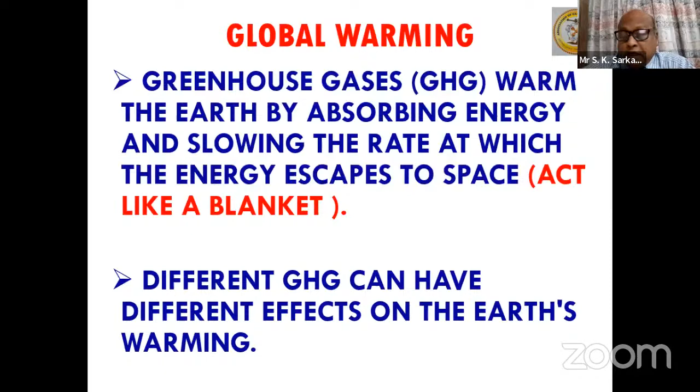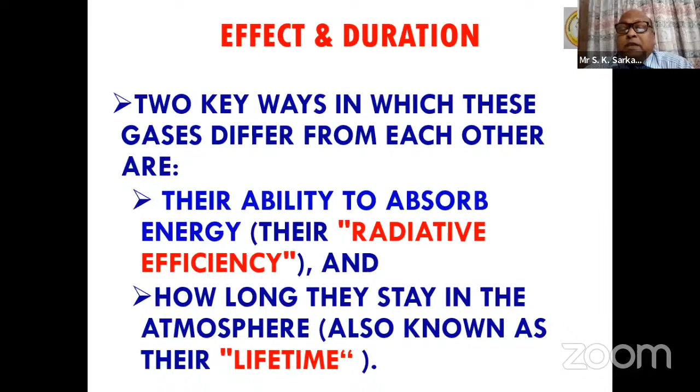There are 2 effects. One is the radiative efficiency of the greenhouse gas, and the lifetime, how long the gas stays in the atmosphere. These are the 2 properties that determine how much warming this greenhouse gas will cause to the earth.

This greenhouse gas emission, yes, of course, when there were fires in the forest, CO2 was emitted. Emission of CO2 is nothing new. But this warming was initiated by the industrial revolution in the 19th century and the subsequent growth of world population. Demand and production of energy from fossil fuels have increased rapidly in recent years. Till now we were safe, we were not careful, but now it has become very rapid. It has begun to skyrocket after the 1950s.

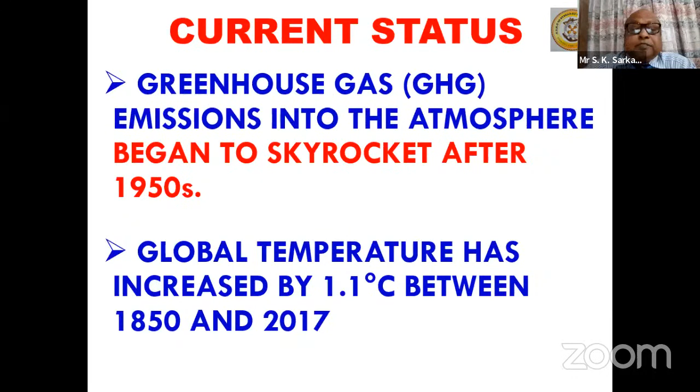Global temperature has increased by 1.1 degrees centigrade between 1850 to 2017. These are the findings of research. Here we can see how CO2 emission has skyrocketed. If we say 1800 is 0, today it has gone to 7,000 million tons of CO2 being released. You see the steep rise, and it is very alarming.

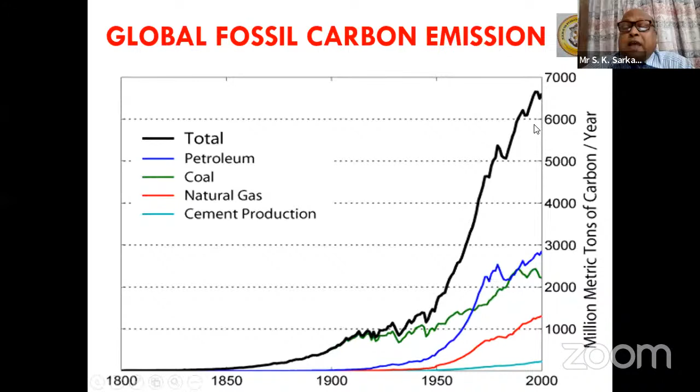Now, if we don't stop this increment of CO2 — there are various greenhouse gases as mentioned earlier in the introduction, but CO2 makes up 80% of what we are emitting. The important greenhouse gas CO2 comes on top, but its global warming potential is only 1, which is very low. What is alarming is the volume and quantity of CO2 coming into the atmosphere. There are other gases like methane at 21, nitrous oxide at 310, hydrofluorocarbons which are used for refrigeration.

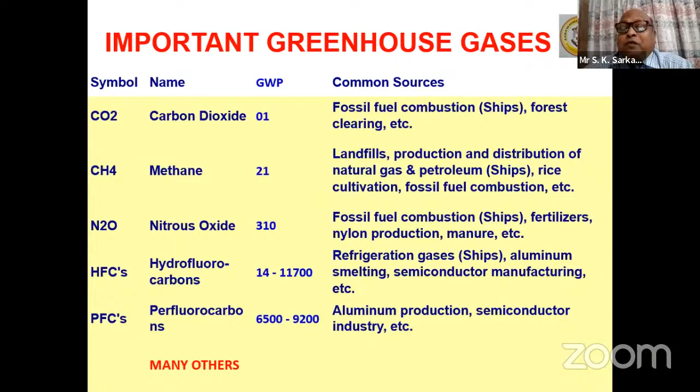Now, what are the environmental effects of this greenhouse gas? And when I say greenhouse gas, please consider it as CO2 only. Melting of polar ice caps and rising sea levels, changes to ecosystems, acidity of our oceans, species extinction, extreme meteorological phenomena — all of us in our daily life are facing these things. It is nothing new, but the only thing is we don't care for it, other than just discussions in seminars.

As per a study of the Intergovernmental Panel on Climate Change, IPCC, global warming of more than 1.5 degrees centigrade would cause unprecedented climatic consequences, such as bigger and more intense storms, rain followed by more prolonged and intense droughts, etc. These extreme weather events could be more frequent and intense and have irreversible repercussions on the environment.

In India, we have recently, in the last year, frequent storms coming, untimely rains, that is causing harm to our environment, our agriculture, our day-to-day life. So these are the bad effects which we are facing every day.

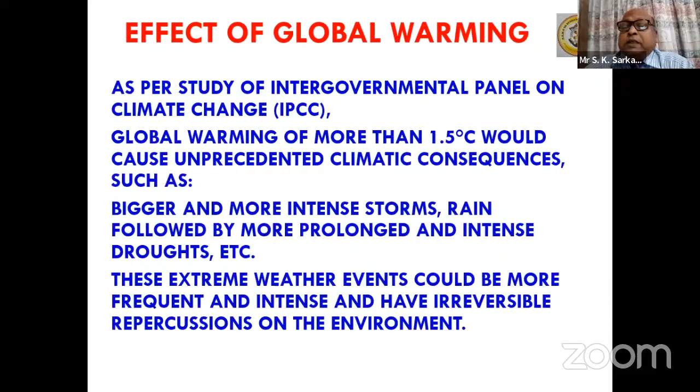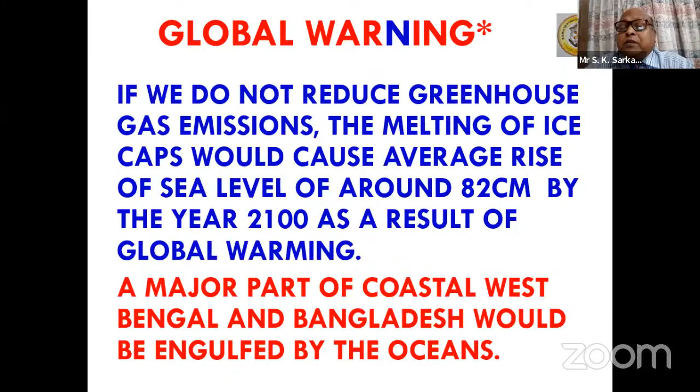Now this has caused a global war—instead of global warming, we say global warning. If we do not reduce greenhouse gas emission, the melting of ice caps would cause an average rise of sea level of around 82 centimeters by the year 2100 as a result of global warming. And most interesting is that a major part of coastal West Bengal, Bangladesh, like Sundarban areas, and many other coastal areas of the world will be submerged due to this global warming. And that will have a very adverse effect on the life of human beings.

So what do we expect from the industry for this? Business carbon offsetting can be done in the following ways: conduct awareness campaigns, improve energy efficiency—do not use inefficient machinery, consume renewable energy, transition to renewable energy, and search for carbon-free fuel. This is very important, the latest thought for carbon-free fuel. I will be mainly covering this area, improving energy efficiency, and my co-speaker, Mr. Arun Kumar Singh, will be talking on search for carbon-free fuel and renewable energy.

Our Vice President asked, can we use solar panels on ships? Certainly we can. There was an experimental ship, of course very low capacity, which went all over the world on solar power. It was built in Japan. There is a Japanese effort to see how effectively we can use solar power, and we are using it. There are cases where we are using solar power. Not only solar, other renewable energy also we are using.

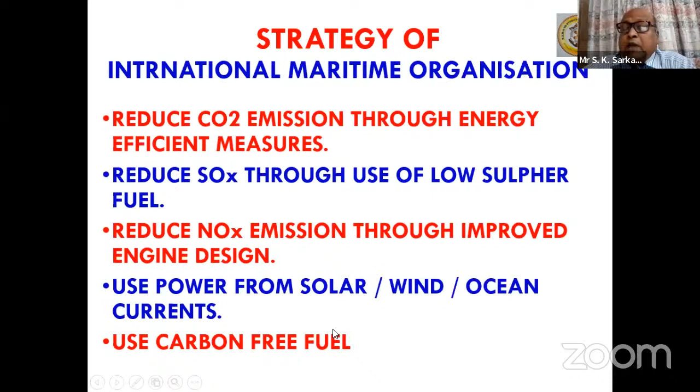Steps so far taken by IMO: in 2013, the International Maritime Organization introduced the Energy Efficiency Design Index for ships, EEDI. So what is EEDI? EEDI is a measure for carbon efficiency—how much carbon you are releasing to the atmosphere per unit transport work, that is ton-miles of cargo carried. How much CO2, that is the measure. And every ship, at the design stage only, the shipbuilder has to assure IMO or the administration that they will not release more than this amount of CO2.

New ships built after 1st January 2015 are required to limit CO2 emission to a maximum value depending on the type of ship, size, and year of build. In fact, it came into force in 2013, with a relief period of 2 years. From 2015 onwards, every 5 years, they are tightening the level of CO2 release into the atmosphere. This is given by EEDI.

I'm not going into details, but there are calculations for how you find out EEDI required, EEDI attained—actually what we have done—and EEOI, Energy Efficiency Operational Indicator, that is your actual performance, what you are actually doing.

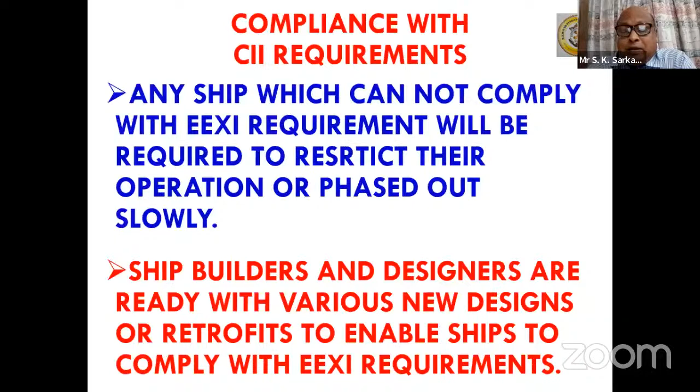Now, not all companies, but there are certain companies who use the latest developments which are going on. But it is not being done always. So IMO wants that everybody must follow the developments. And that is what this EEXI and CII is going to ensure.

So how do you get energy efficiency? By improving hull efficiency, you can improve EEDI or EEXI, CII. These things can be achieved in various ways. First is improving hull efficiency, improving propeller efficiency, and improving the overall thermal efficiency of the propulsion plant. These are already developed, but not all owners are following this, so carbon emission is high even with the EEDI.

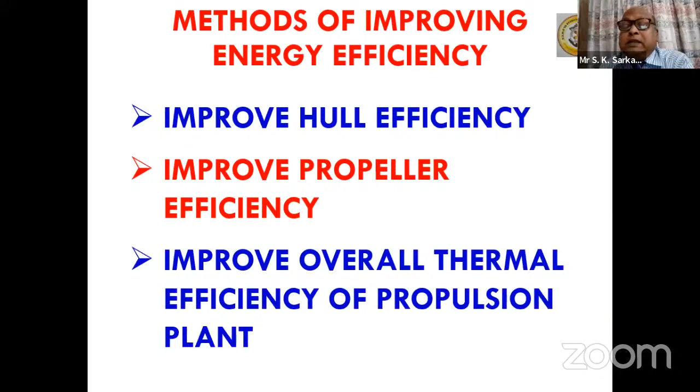So what are the ways shipping companies and ship owners will be able to comply with the latest requirements of CII and EEXI? Now let us see how we improve the efficiency.

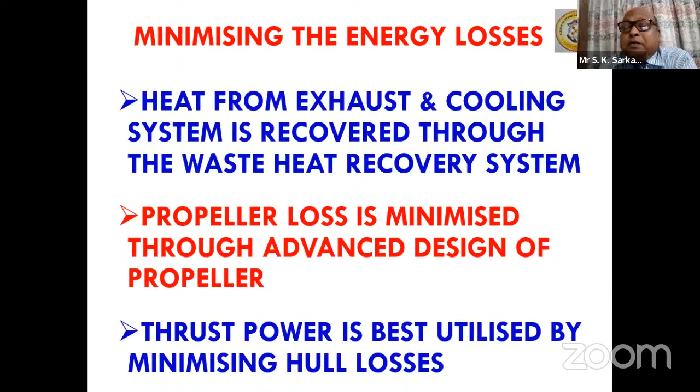So what is done? That is what I explained now. Heat from exhaust and cooling system is recovered through waste heat recovery system. Propeller loss is minimized through advanced design of propeller. Thrust power is best utilized by minimizing the hull losses. Actually, why do you require the thrust? For moving the ship from A to B, if there's no friction, no power will be required. Because of friction, we are requiring the power to move the cargo. Now that friction has to be reduced.

Now, waste heat recovery, just for your knowledge, this is an advanced MAN B&W engine waste heat recovery system. The engine efficiency is above 49%, and overall efficiency goes much higher. What is being done here? Jacket cooling water, some of the heat of the jacket cooling water - this engine is about 68 megawatt, and 14% of the 68 megawatt, about 8-9 megawatt, that much energy goes to waste if you don't recover it. So it is being recovered here.

And another area, the turbocharger, supercharging air, scavenge air. In the turbocharger, air is compressed and temperature comes to 193 degrees centigrade. So that heat we can take out and bring it to the exhaust steam system, and by which we can run the steam turbine to generate electricity. This is one waste heat recovery system. So we are reducing the losses.

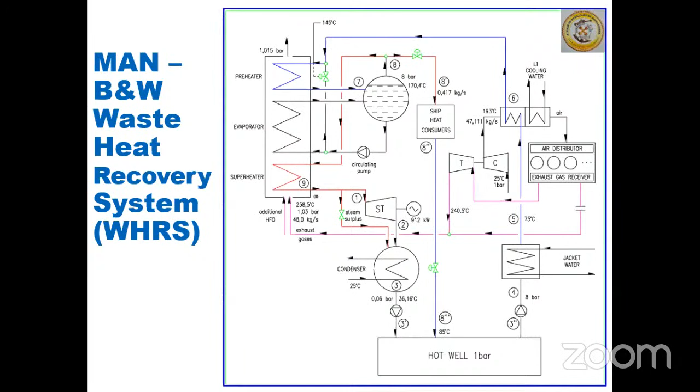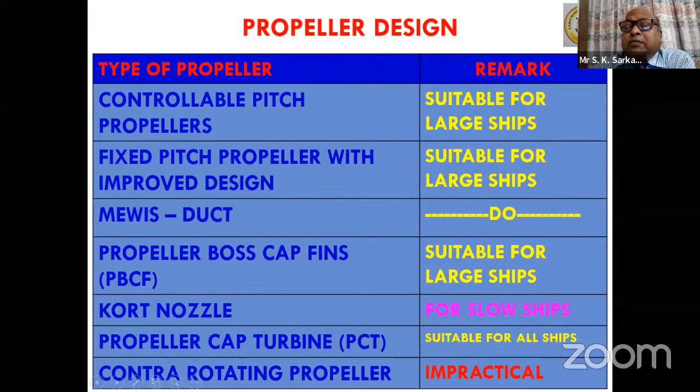Now there are controllable pitch propeller designs, suitable for large ships. Fixed pitch propellers suitable for large ships. Mewis duct, okay, for large ships. Propeller boss cap fins suitable for large ships. Kort nozzle, actually this is not for normal ships, these are for tugs and slow ships. Propeller cap turbine, this is also suitable for all ships. And contra-rotating propeller, this is impractical because it's a very complex mechanical system.

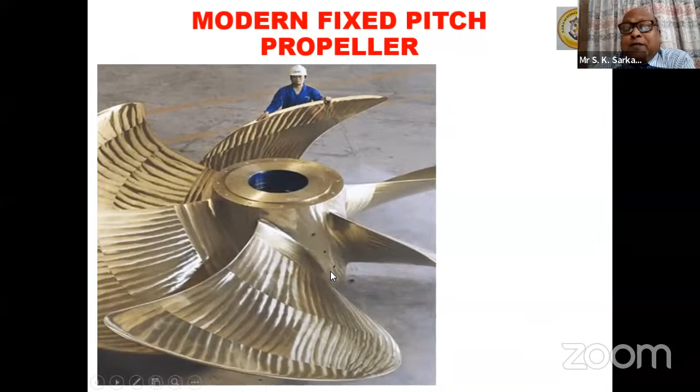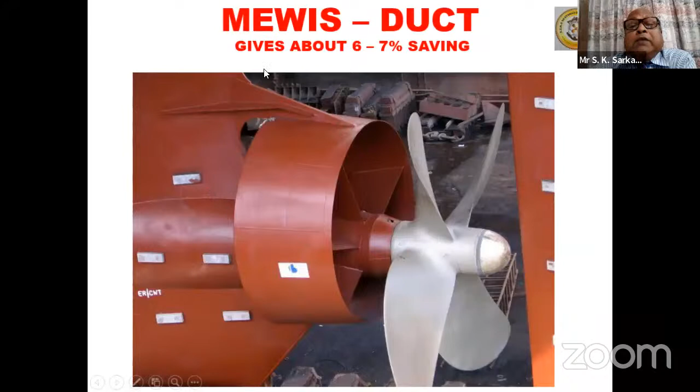This is Mewis duct. This gives streamlining of the water into the propeller, giving about 6 to 7% saving. This is propeller boss cap fins. There are some fins you add on the propeller boss cap. It can very easily be used and gives about 3 to 5% saving. This is one type of advanced design of propeller by Wärtsilä.

Improvement by the cleaning of the hull. Conventionally, you clean the hull. Earlier, we used to clean the hull every 2.5 years, drying it up. But nowadays, every shipping company keeps track of how much is the hull resistance, and from there they are cleaning the hull more regularly, underwater cleaning.

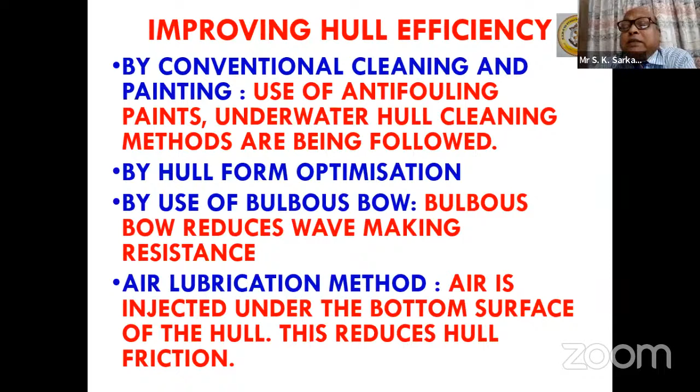Use of bulbous bow. This is another attachment to the ship which reduces the wave making resistance. And air lubrication, this is another very important and latest design. So this is the fouled hull. From the load diagram, we can find out where the engine is operating, so we can find out whether the hull is fouled or not. And without going to dry dock, underwater hull cleaning can be done. So fuel consumption goes down, and hull painting reduces the hull friction.

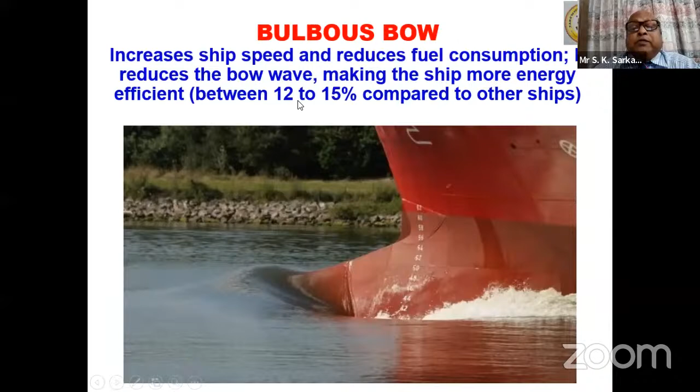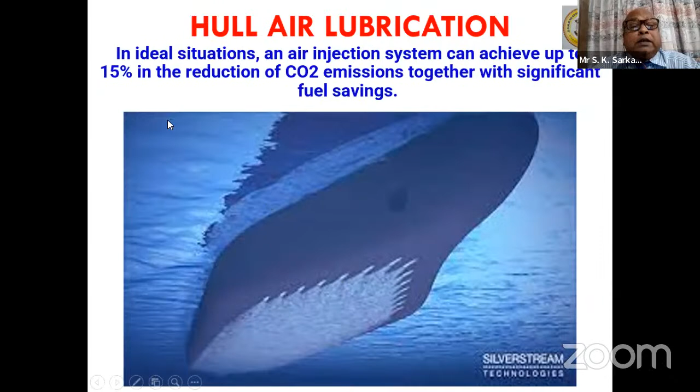This is the bulbous bow, which is underwater and it reduces wave making resistance. This gives between 12 to 15% saving compared to normal. And this is the air lubrication of the hull. Under the hull, air is being injected, and a film of air forms around the ship's hull, and it reduces friction. 15% reduction of CO2 emission is achieved by this.

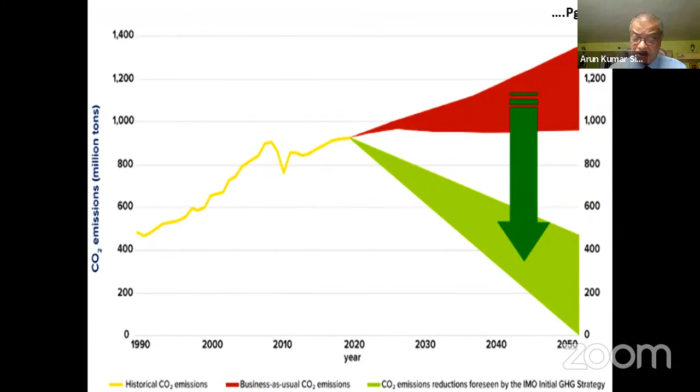If we have zero carbon, that is what the goal is. If we can continue our research and find a fuel that produces zero carbon, by 2050 the emission may come down to zero, but that is just one of the possibilities in the offing. Until 2030, the focus is predominantly on biodiesel, and until 2050 on transition of LNG and bio-LNG.

In 2020, there was a shift from using heavy fuel oil to using light fuel oil to power ships. In January 2020, the International Maritime Organization, IMO, put a cap on sulfur content of marine fuels. You have to use less than 0.5% sulfur content. That brought down the consumption of heavy fuel oil from nearly 172.5 million metric tons to about 100.5 million metric tons.

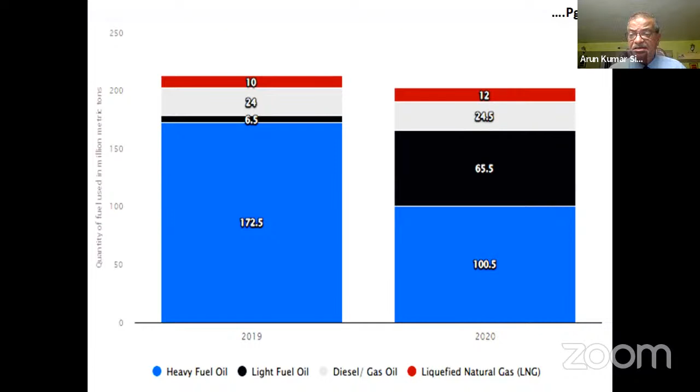And it was supplemented by low sulfur diesel oil. The rest of your liquefied natural gases and other fuels remained pretty much constant. They did not increase in this particular period.

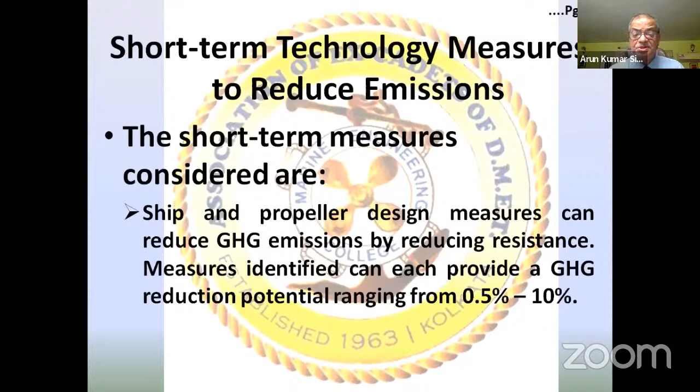Now, what short-term technology measures can we have to reduce emissions? The short-term measures considered are ship and propeller design measures, which can reduce GHG emissions, as Mr. Sarkar said, by reducing resistance. Measures identified can each provide a GHG reduction potential ranging from 0.5% to 10%, depending on what alternate power assistance technology we use, whether it is Flettner rotors driven by air, towing kites, sails, solar panels, or shoreside power.

Now, shoreside power can only be used in port when the ship is alongside. Again, the energy source for that particular power should be taken into consideration. In case we are using fossil fuel, there is not going to be any reduction. These measures can reduce GHG emissions from 0.5 to 15%, and up to 100% as far as shoreside power in ports is concerned, in case we are not using fossil fuel for generating power.

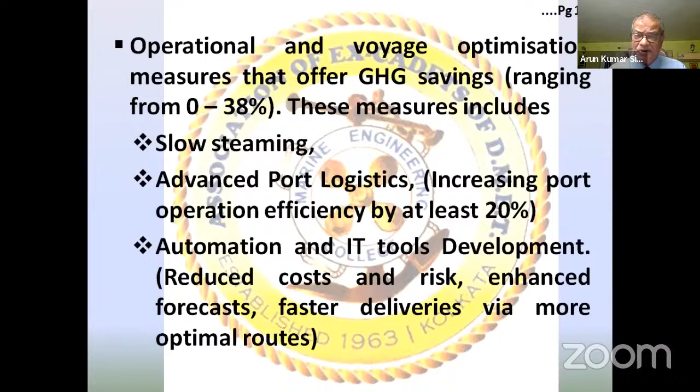Operational and voyage optimization measures offer GHG savings ranging from 0 to 38%. These measures include slow steaming, advanced port logistics, increasing port operation efficiency by at least 20%, automation and IT tools development, reduced costs and risk, enhanced forecasting, and faster deliveries via more optimal routes. All these things are there in the offing, and they have been used for a very long time, but these are not the things we are looking forward to for reducing greenhouse gas emissions.

Longer term shifts to alternative fuels.

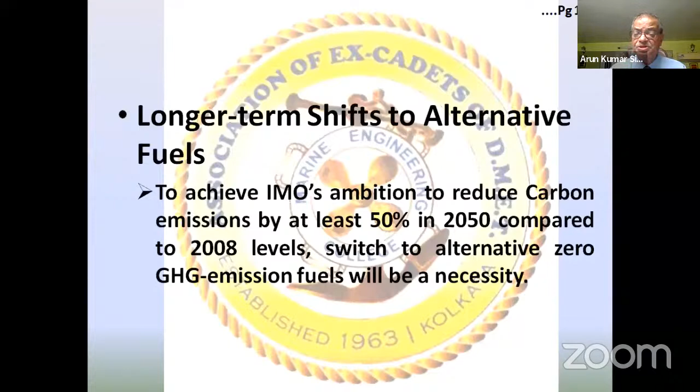To achieve IMO's ambition to reduce carbon emission by at least 50% in 2050 compared to 2008 levels, switching to alternative zero GHG emission fuels will be a necessity. If we cannot do that, it is going to be very difficult to reach the goal that IMO has set. The trend shows transition will first apply to short sea shipping and later to long distance shipping.

Fuels investigated have been categorized into two main groups: drop-in fuels, which can be used in the existing fleet largely without engine modifications up to certain blend limits, and others.

Now, when we talk about shipping, we must understand that there are set rules and regulations as far as the combustion of fuel is concerned, and the engines. Changing the whole engine setup for the old ships is going to be a bit difficult, but there can be some fuel which can be used without changing or doing any retrofit as far as the engines are concerned.

Then we have to go for alternative fuels which require significant engine fuel system modifications, alternative engines and/or infrastructure. Unless we do that, we will not be able to achieve it.

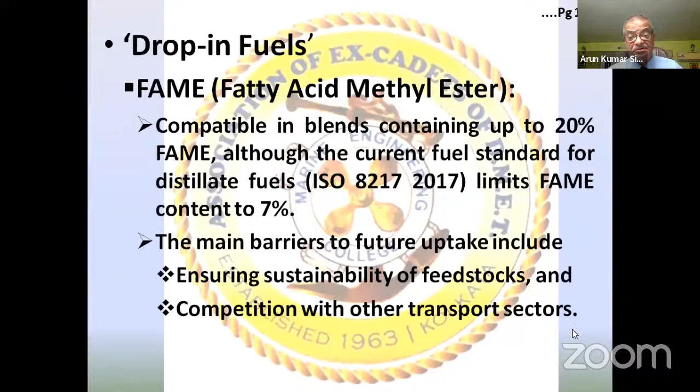The most important drop-in fuel that we have in the present day is fatty acid methyl ester, FAME, compatible in blends containing up to 20% as of the current standard for distillate fuel ISO 8217 2017, which limits FAME content to 7%. The main barriers to future uptake include ensuring sustainability, whether we will be able to produce so much of fatty acid methyl ester or not, because of the feedstocks required to make this particular fuel, and competition with other transport sectors. If they are cheaper, then making this particular fuel is not going to be of much use to us.

Then we can go for hydrotreated vegetable oil, HVO. It is compatible with the existing infrastructure and engine systems, subject to approval by the manufacturers. Most of the time, we have to check with manufacturers whether the engines can use the alternate fuel or not. Minor modifications may be required. There is no upper limit as far as blending HVO is concerned. We can use HVO at the present stage without any modification as far as the engine is concerned.

The main barrier to future uptake includes ensuring sustainability of feedstock and competition with other transport sectors, the same as FAME.

Then we can use dimethyl ether, DME. DME has been a known substitute for diesel for more than 20 years, but is yet to be widely used as an alternative maritime fuel. DME can be used with marine diesel oil in blends equal to or less than 40%. It's not a permanent solution, but during the transit phase, we can use this particular fuel to keep on reducing the carbon emission from ships. DME use will need engine retrofit or specific engine design. The barrier to future uptake is the need for green DME production and supply, that is, no more use of fossil fuel along with it.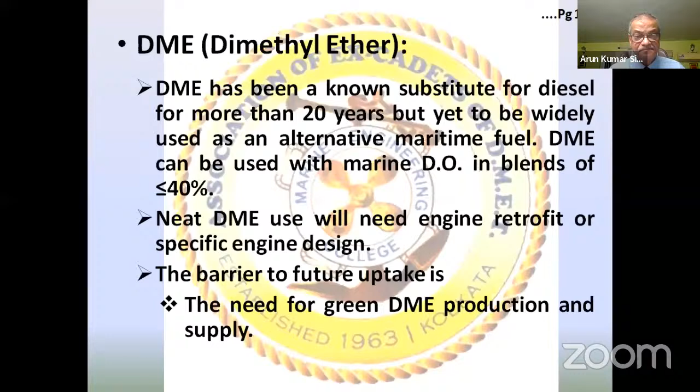Other alternative fuels: LNG, liquefied natural gas, a fossil fuel with a lower carbon content than HFO. LNG as a marine bunker fuel has already reached market maturity. It emits 25% less CO2 than common marine fuels and lower nitrogen oxide, sulfur oxide, and particulate emissions. It can only be used as a transitional fuel till zero carbon emission fuels are used for substitution. This is not going to be a permanent solution.

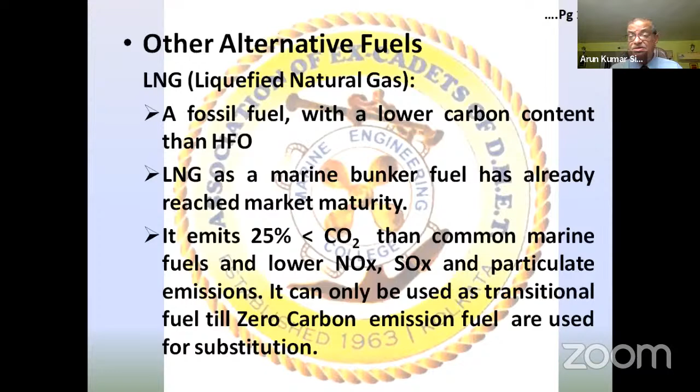The main barriers to future uptake include life cycle emissions. That means during its lifetime, if the carbon dioxide is not utilized by nature, it is going to keep on accumulating in the ecosystem. Bunkering infrastructure is also one of the things. And while we are burning LNG, the methane slip that keeps on producing carbon content in the atmosphere is another big deterrent.

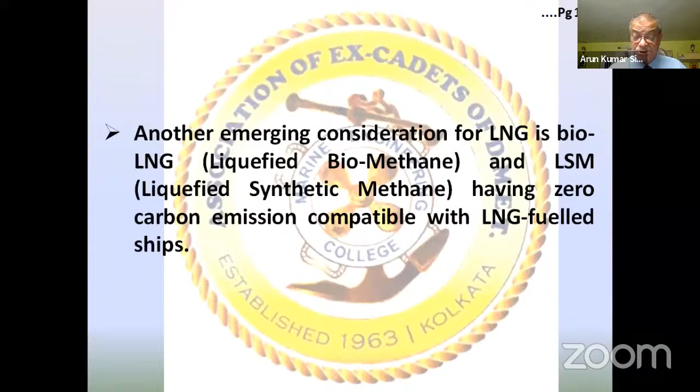Another emerging consideration for LNG is bio-LNG, liquefied biomethane, and LSM, liquefied synthetic methane, having zero carbon emission, compatible with LNG fueled ships. So that is one of the things we are supposed to be looking forward to. Biofuels, net zero fuel: biomethane, bioethanol, and biomethanol produced from biogenic feedstock derived from plant, agricultural waste, algae as feedstock for the future.

Biofuels emit CO2 when burned in an internal combustion engine. Biofuel retrieves CO2 from the atmosphere during the production of their feedstock, thus labeled net zero fuel from a life cycle perspective. Whatever CO2 is generated, if the feedstock can take it back as far as the environment is concerned, the net zero fuel thing can be utilized.

Methanol is another fuel that can be used, mainly produced from natural gas.

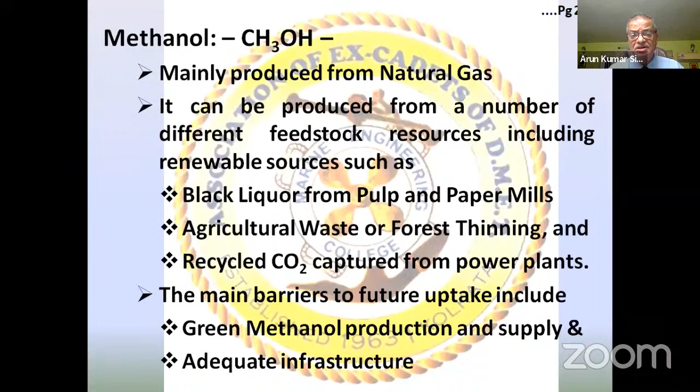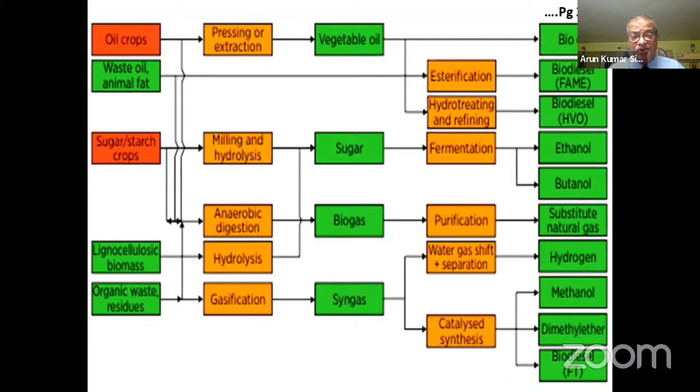Another fuel we can look at is ammonia. Until recently, there has been little motivation to explore ammonia as maritime fuel. If synthesized from renewable resources, meaning that while we are producing it the resources are renewable, through sunlight, wind energy, or other renewable energy, green ammonia as a fuel is carbon free. Green ammonia production uses the renewable electrolysis process to separate hydrogen atoms from oxygen atoms within water using electrolyzers, which are already in extensive commercial use.

So there should not be any difficulty in utilizing ammonia in the future. Greenhouse gas reduction potential of ammonia depends on the percentage of electricity generated from renewables. As I said, if we have renewable energy, it is going to become carbon free as far as generation is concerned. The main barriers to future uptake include green ammonia production and supply, price parity, and availability of solid oxide fuel cell technology for future use in fuel cells.

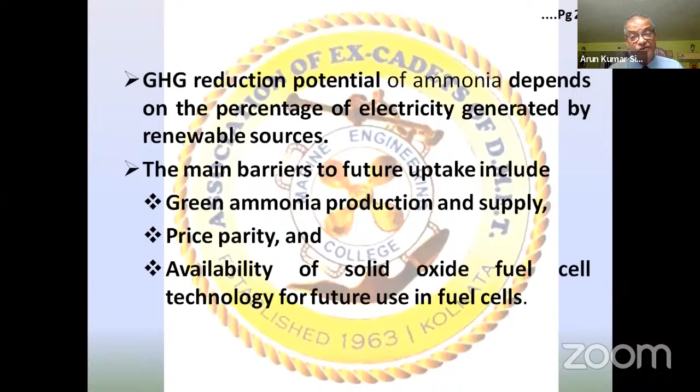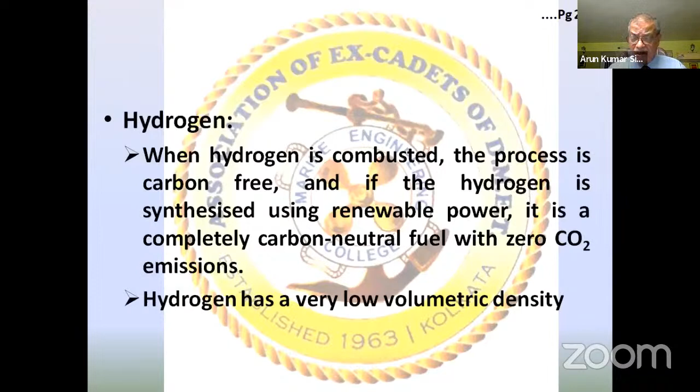When hydrogen is combusted, the process is carbon free. And if the hydrogen is synthesized using renewable power, it is a completely carbon neutral fuel with zero CO2 emissions. Hydrogen has a very low volumetric density, which makes storing it a bit difficult, but people are looking into this aspect too, how to store it at very high pressure and very low temperatures. Main barriers to future uptake include green hydrogen production and supply, cost and price parity, and safety concerns in storage on board. It will only begin to scale from the late 2030s, reaching competitiveness in the 2040s, and meeting only 5% of global energy demand by 2050 as per industry predictions. But there are many people working on it, and you never know how things are going to develop in the near future, and generation of hydrogen may become available quite freely.

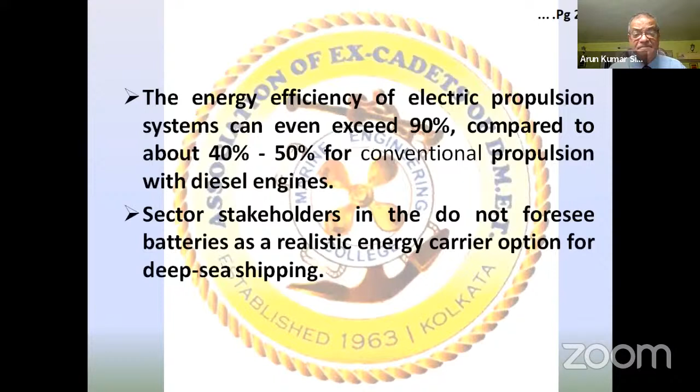Batteries have been used as an energy carrier for short sea shipping since 2015. Compared to using conventional fuels, emissions of CO2, nitrogen oxide, and sulfur oxide are reduced when using full electric battery, and hybrid battery and diesel configurations can also be used during the transitional phase. The energy efficiency of electrical propulsion systems can even exceed 90%, compared to about 40 to 50% for conventional propulsion with diesel engines. Sector stakeholders do not foresee batteries as a realistic energy carrier option for deep sea shipping. The main barriers to future uptake include fire risk, range, cost, weight to size, and end of life disposal. Where are we going to dispose of these batteries once they reach the end of their lives?

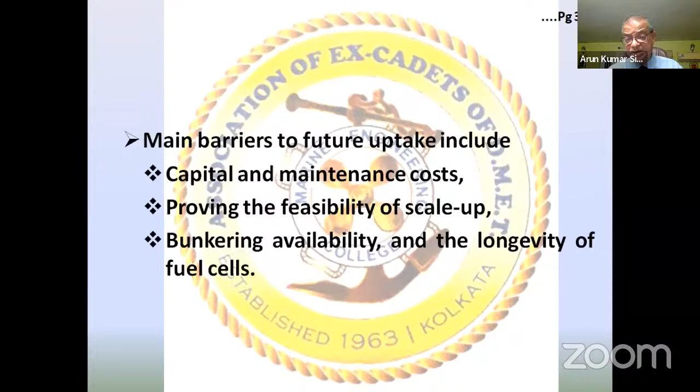Using fuel cells instead of internal combustion engines can reduce emissions. If the fuel used is hydrogen, as discussed before, the only products produced in the fuel cell reactions are water, electricity, and excess heat. Powered by fuel produced using renewable energy, the carbon reduction potential of fuel cells is 100%. But the main barriers for future uptake include capital and maintenance costs, proving the feasibility of scale up, which cannot be increased overnight, bunkering availability, and the longevity of fuel cells.

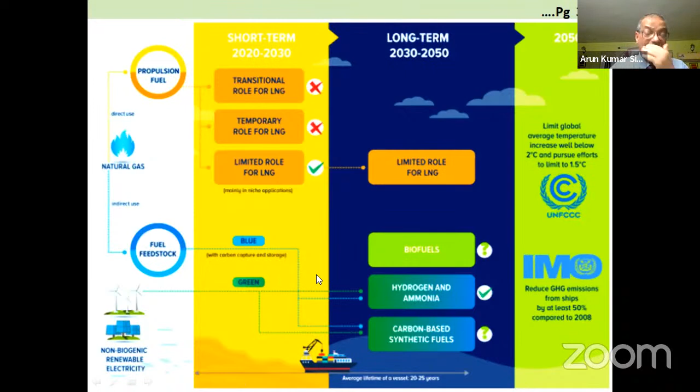This is one of the IMO requirements regarding natural gases, the propulsion fuel being the LNG part of it, and the indirect use of natural gases for fuel feedstock. From there we can see transitional roles for LNG, temporary roles for LNG, and limited roles for LNG. We have this, but the green and blue part of it is biofuels, hydrogen and ammonia, and carbon-based synthetic fuels—that is the biofuels of the future.

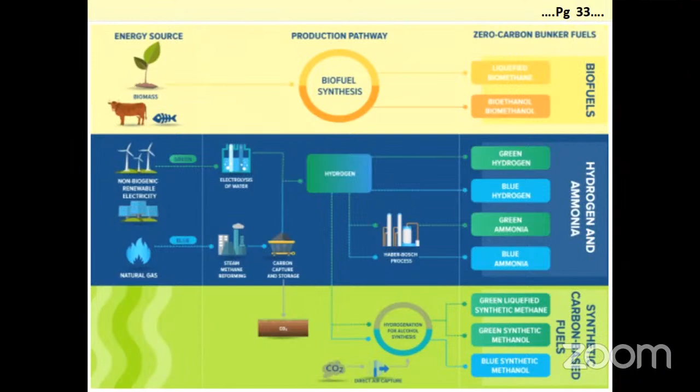So hydrogen and ammonia are the future fuels we are looking at, and this is one way we are supposed to be processing it. After assessing each zero carbon fuel's features from an environmental, economical, and technical perspective, ammonia and hydrogen stand out as the most promising future zero carbon bunker fuels due to their scalability, cost effectiveness, and low GHG life cycle emissions in the long term.

The search for the ultimate fuel to attain zero carbon emission continues on a positive note. The shipping industry has already weathered 3 energy transitions during its long history: from woman power to wind, from wind to coal, from coal to oil and LNG.

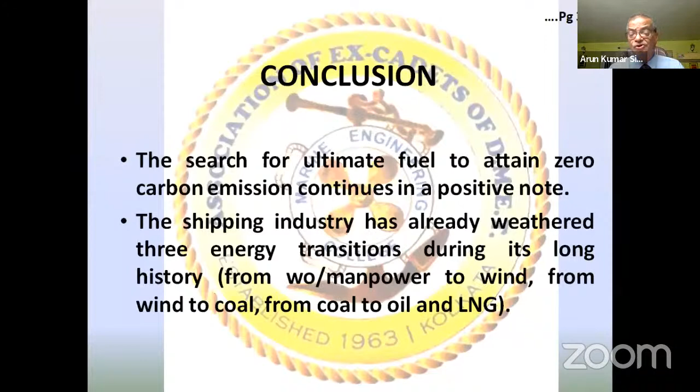Both developed and developing countries stand to benefit from a wide range of business and development opportunities. Ship owners or charterers are responsible for fuel charges, operational measures, technological investment, and cargo loading. An incentive for ship owners to implement energy efficiency measures depends mainly on the charter rates. Non-accrual of benefits of energy efficiency measures acts as a barrier in adopting or ordering new ships and while retrofitting vessels. So until and unless the industry looks into this particular aspect, ship owners may not be very much interested in new technology because they have to invest a lot to get their returns back.

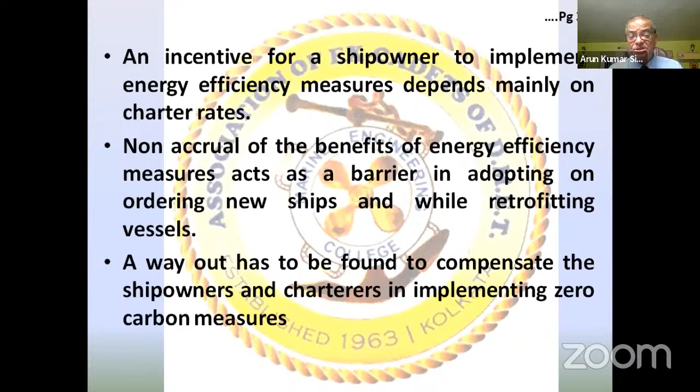A way out of this can be found to compensate ship owners and charterers in implementing zero carbon measures. Importantly, the search for fuel for marine vessels should come to an end at the earliest. IMO's goal is 50% reduction of CO2 emissions by 2050, paving the path for zero emission.

The transition of the shipping industry towards ammonia and hydrogen is likely to change the landscape of the global bunker fuel market, creating new opportunities for developing countries, particularly those with significant renewable energy resources such as Brazil, India, Malaysia, and Mauritius. This is one of the things which IMO has given, that what type of fuel is supposed to be used.

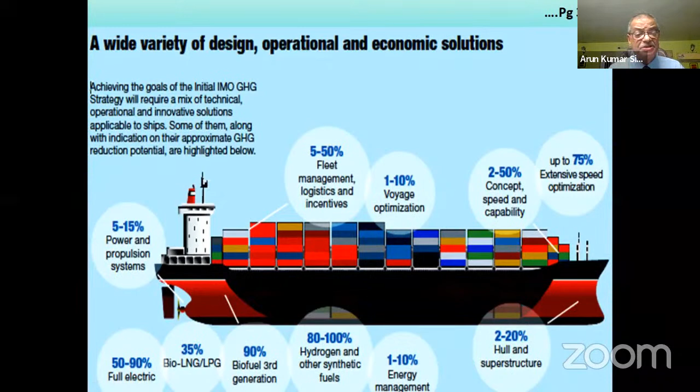The references are from various sources, and wishing all a sustainable shipping with net zero. Thank you all, and sorry for the time that I have taken extra. That's all from my end.

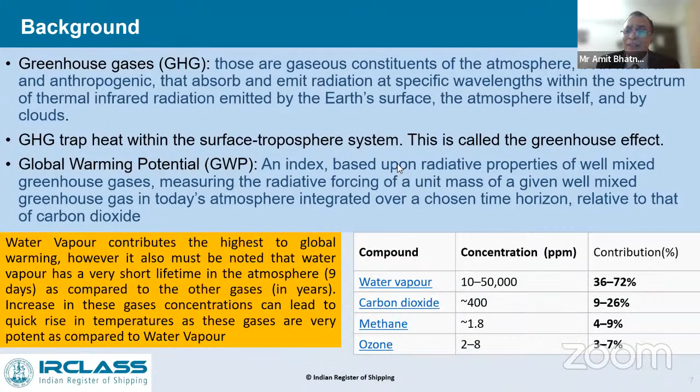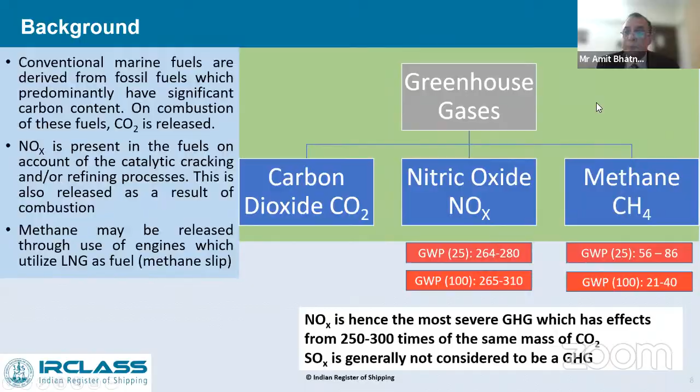I think this major portion was already covered, so I will try and skip this. I just wanted to show here that we have CO2, nitric oxide, and methane, which has high global warming potential. Now, these were a few fuels which I wanted to discuss, but my job has been reduced by Mr. A.K. Singh, so I will just move ahead from here.

I'll quickly go through this - it was already covered, so I'll be a little fast. As far as LNG is concerned, the storage temperature is well known: minus 162, and then storage pressure.

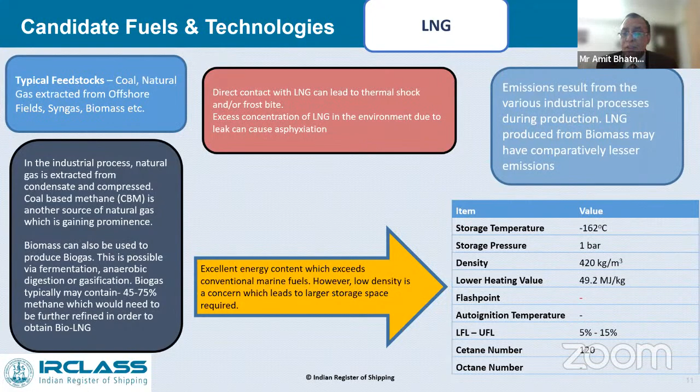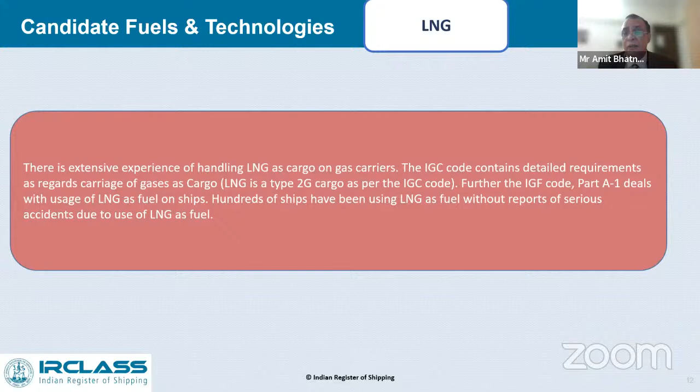Now what is important here to discuss is that there is extensive experience of handling LNG, because LNG as cargo on gas carriers has been around for almost 50 years. The IGC code contains detailed requirements regarding carriage of LNG as cargo. Further, IGF code part A-1 deals with use of LNG as fuel on board ships, and a large number of ships have been using this without any accident, though it is considered to be very unsafe in normal terms. So what happens is CO2, SO2, NOx, and particulate matter emissions are much reduced compared to conventional fuel. However, as other speakers have also spoken about the methane slip, the technology is improving, so this methane slip should also go away over a period of time, or reduce to a larger extent.

Now, FAME was also discussed, so whatever has been discussed, I am not going to repeat it. I will just come towards the outcome of various technical discussions on FAME. IRS has been proposing use of B20, that is 20% blending, and permission for this 20% blending has to be obtained from the statutory authority as per MARPOL Annex 6 requirement, Regulation 3.

I am happy to share with you that my colleagues have been working on this, and the trial of B20 has been successfully completed on board ships of one of the shipping companies in India.

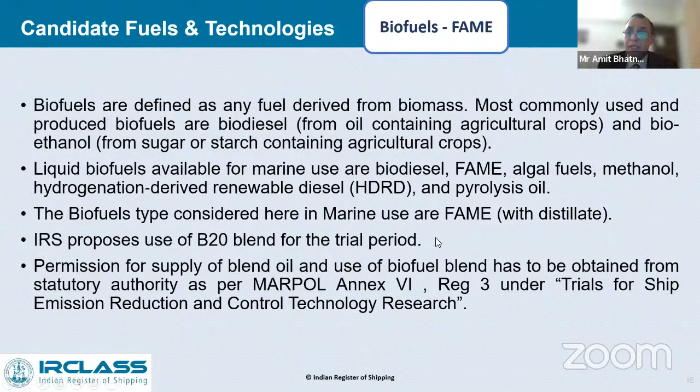So these are the guidelines available in terms of best practices for fuel oil suppliers for assuring quality of delivery to these ships, as per MEPC circular 875. Now, what needs to be done is that the bunker supplier has to register in accordance with MS Notice 3 of 2014, in accordance with MARPOL Annex 6 Regulation 3, and the base diesel fuel has to be in accordance with ASTM standard D6751-08, which is the specification for blending of DM grade fuels.

And the test report of the sample has to be obtained from an accredited laboratory, as being followed in terms of BDN on board. Another important factor is the flashpoint of B20 fuel, which is to comply with SOLAS requirement as well. That is required with respect to safety.

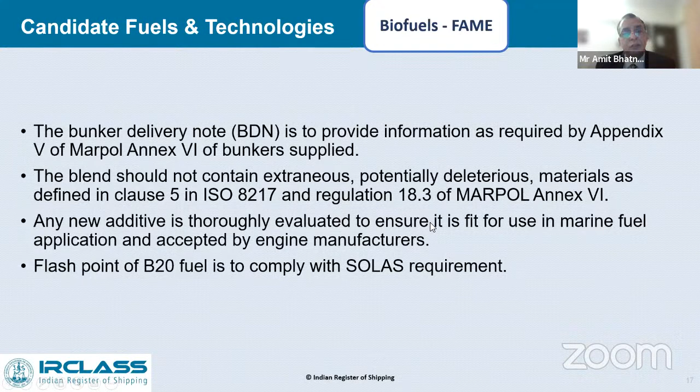I will not go deep into this, the slide is already there with you. The concurrence from the engine manufacturer is extremely important, because first thing, the engine should be able to perform to the required power.

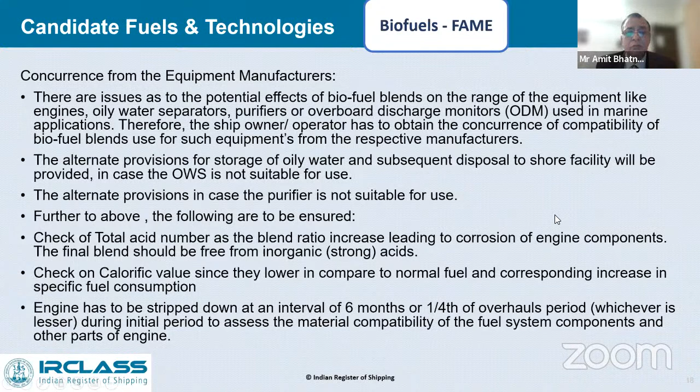And various purifiers, overboard discharges, ODMs, those should also be compatible when we are using this type of fuel. And then the engine needs to be stripped down, at least for the initial days.

One second. Then I will just quickly go through HVO, which I think is already covered, so I can go a little faster here.

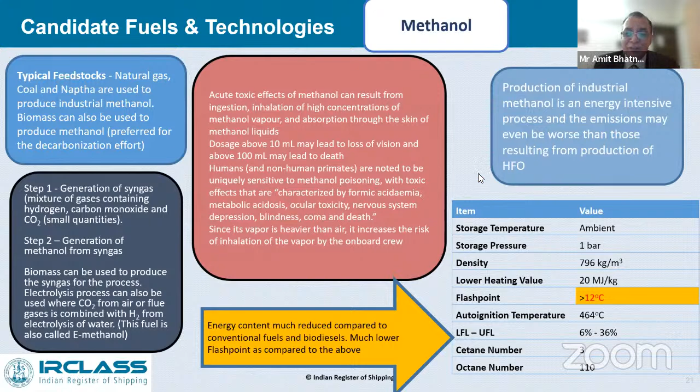Methanol is very well covered, so I'll go a little fast. As for methanol also, as has already been stated, the SOx, NOx, and particulate matter emissions are very much less for biomethanol. Now, the production methodology is also very important here, because when the green fuel is to be produced, the methods adopted to produce this fuel are also supposed to be green.

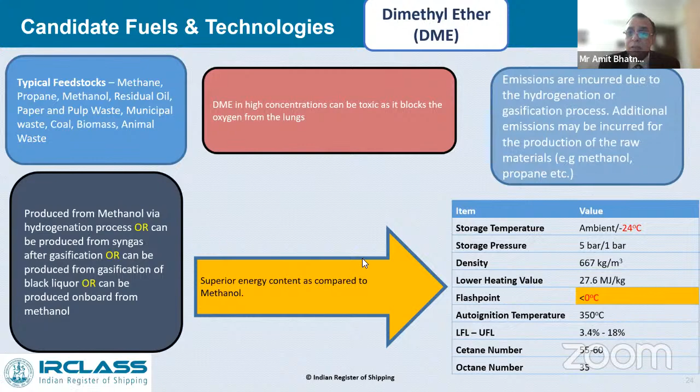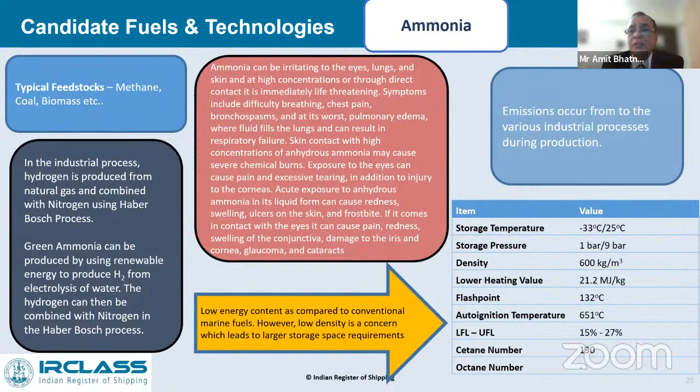Then we have got ethanol, already covered. Then DME, already covered. So, ammonia is likely to be a good candidate in future. However, handling of ammonia, as already discussed, has got certain issues which need to be dealt with. Then we have got hydrogen, which was also covered by Mr. Singh.

Now, what measures can be used for this? There can be a methodology of onboard carbon capture - installation of a scrubber to capture CO2 from the flue gases, installation of a dedicated CO2 storage tank which would typically store the liquefied CO2, and discharge of CO2 at reception ports. So this infrastructure needs to be developed.

When you have an onboard CO2 capture system, the ship can continue to use conventional marine fuel, you don't have to shift over to a new fuel. Installation of the scrubber system will burden the existing engine room space, and power requirements will also be affected. Installation of a dedicated CO2 tank would lead to sacrifice of further dead weight for an existing ship, if it has to be done. And for new ships, of course, the owner may not like to have such a system.

So then additional active substances would be required to be stored on board for the scrubber function to capture the CO2, and there's the requirement of additional infrastructure at national level for safe discharge of CO2, which preferably has to be underground. So these are certain challenges with respect to onboard carbon capture.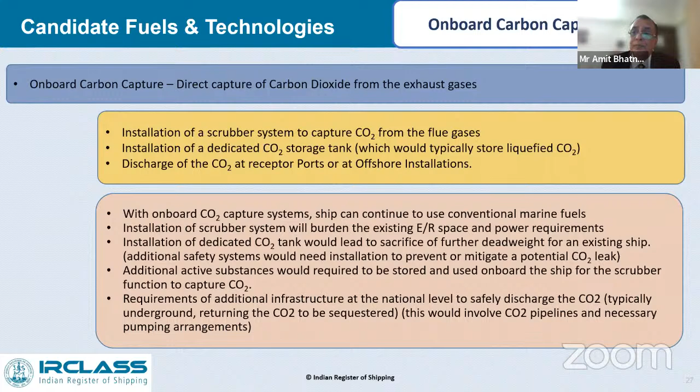Nuclear power ship is another possibility which navies have already been using - submarines, everyone is well aware about it. The concerns are with respect to design, installation, and operational costs, the leakage of radiation which we had seen at Chernobyl once upon a time and Fukushima reactors, and disposal of waste fuel after being consumed, reactor protection for typical hazards such as collision, grounding, etc.

Low storage space requirement for fuel. Delivery of high rated power performance. Nuclear reactors on board ships have delivered power up to 170,000 kilowatts, which as of now no other fuel may be able to achieve.

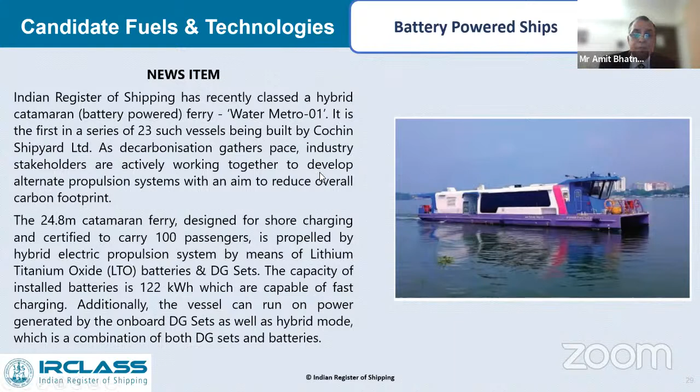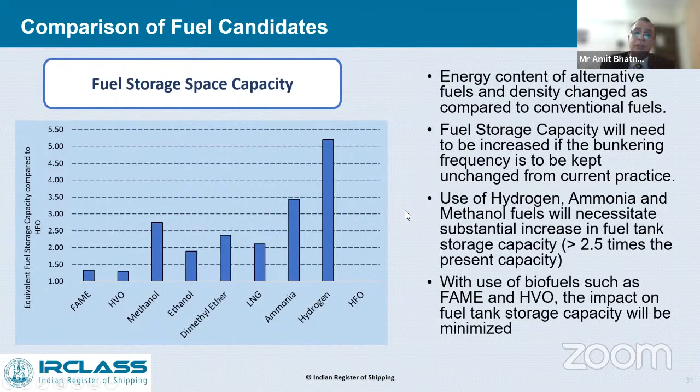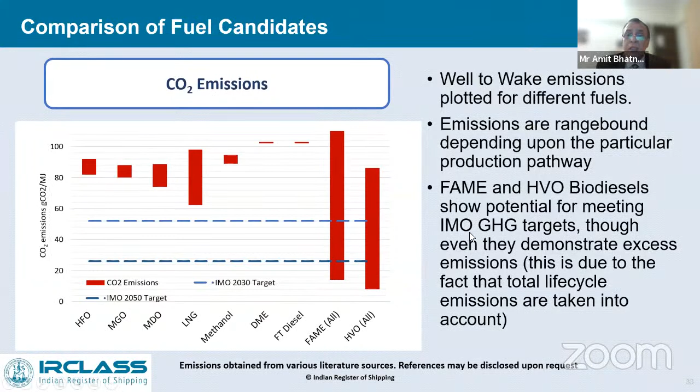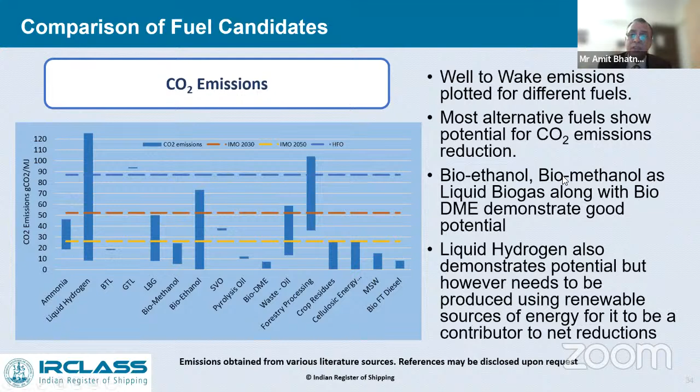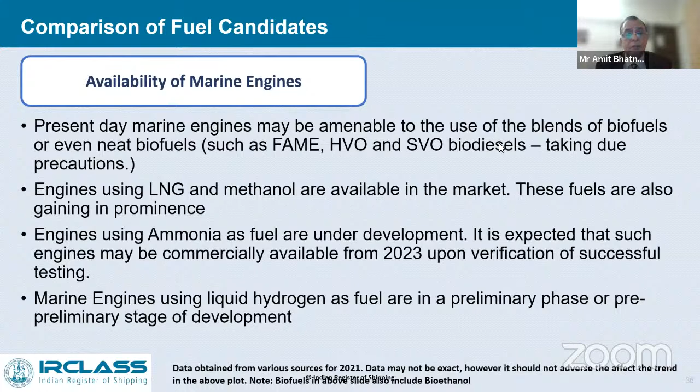Engines using ammonia as fuel are under development. It is expected that such engines may be commercially available from 2023 upon verification of successful testing, which is still in process. Then marine engines using liquid hydrogen as fuel are in preliminary or pre-preliminary stage of development, so it is too early to make any comment about it.

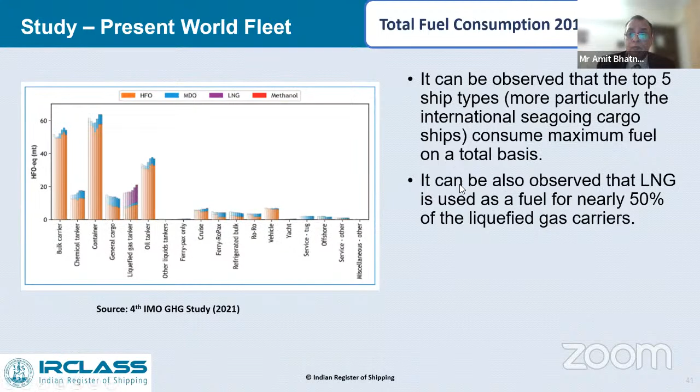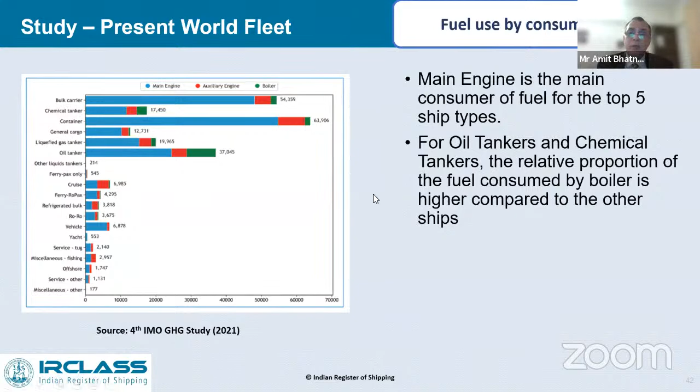Then we have 675 ships fitted to use cold ironing, that is shore power. Shore power, even in India, it is picking up. JNPT is the first port going ahead with installation of shore power, and as IRS we are supporting that.

Here, 515 ships are container ships out of the 675. Then we have 357 ships using gas as primary fuel, excluding the gas carriers. And we have got 236 ships assessed as ready to be retrofitted with machinery for using gas as fuel.

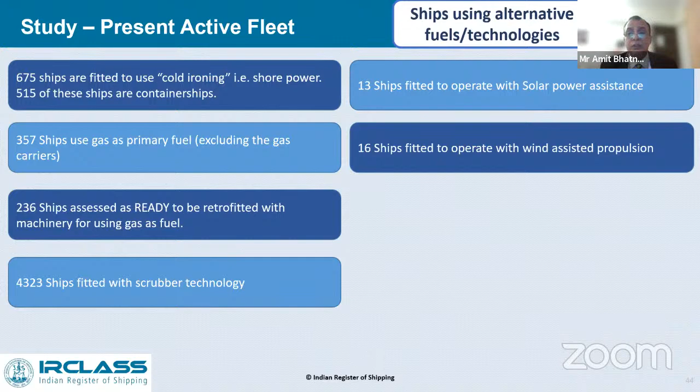And we have 4,323 ships fitted with scrubber technology as per the data available today, and 13 ships fitted to operate with solar power assistance, and 16 ships fitted to operate with wind-assisted propulsion.

Now, this is what we talk about bunkering for ships which are under construction. That is biofuel, LNG, methanol, ethanol, ammonia, and experience is available for carriage of these as cargo or use as ship's fuel. For liquid hydrogen, there's some more study required as of now, so it will take some time.

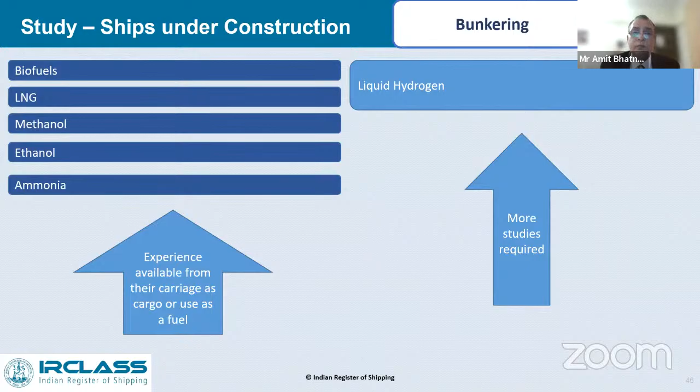With this, I would like to conclude with the following statements. Various candidates are available to support IMO decarbonization drive. However, there is no single solution to the problem. Rather, several options need to be explored. Alternate fuel production, as of present day, may not be sufficient to completely do away with conventional marine fuels.

I'm talking about today's scenario. Biofuels are excellent fuels which have less impact on storage requirements, can be used in present marine engines, of course with certain modifications, and operational requirements need to be addressed, and do not have significantly less energy content. However, sustainability of these fuels is to be explored. Sustainability is to be explored further, as well as it may be noted that the land transport and aviation sector would also demand these fuels. So there would be a competition to use these fuels.

Onboard carbon capture may be a good interim solution. However, it will call for facilities at the port for reception of onboard generated CO2. Infrastructure for disposal of CO2 will also be necessary at that point of time.

It may be important to note that this is a problem which marine industry may not be able to solve single-handedly, but would rather need efforts from all sectors. And it's heartening to see that the entire top of IEI is sitting today and contributing towards this cause.

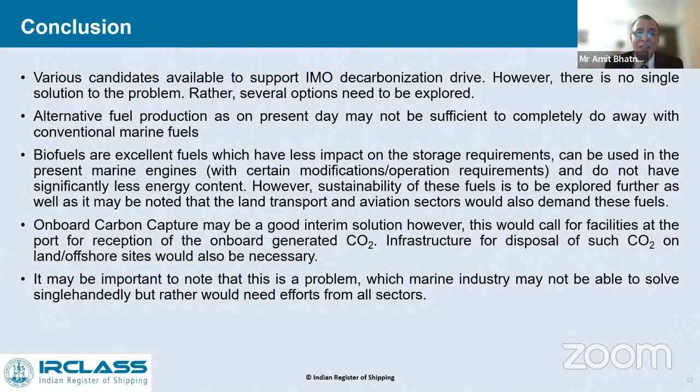LNG at present is the fuel which will help reduce CO2 emissions to an extent, and its experience is also available as fuel on board. However, in the long run, options need to be explored to generate LNG from biomass in a viable manner. Availability of renewable power generation across the globe, along with carbon capture from industry plants on land, would play an important role in determining the emissions from the marine industry.

Ammonia appears to be a useful candidate as an alternate fuel. It will also depend upon the technology on board to use it in a combustion engine or as a fuel cell. That is yet to be seen. Host of biofuels developed from waste biomass are available in principle. However, their feasibility is to be checked as to whether their production can be scaled up efficiently, sustainably, and viably.

The age of fleet, which is very important, is comparatively young, that is around 15 years or less. Thus, phasing out these ships from service has to be gradual. Use of biofuels or biofuel blends or LNG or onboard carbon capture may be useful to reduce GHG from these ships until a long-term sustainable candidate is established.